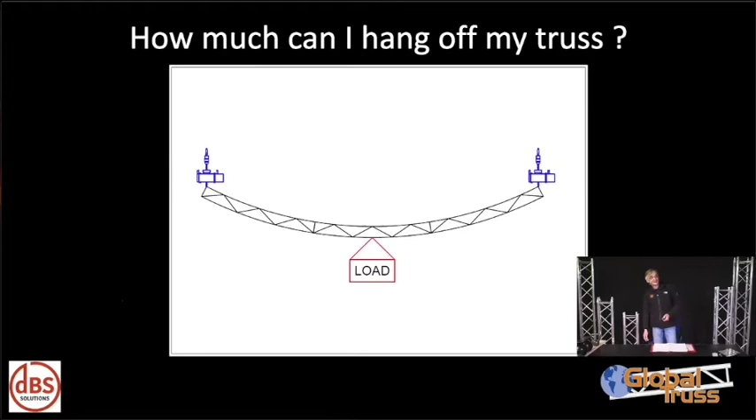Coming to our first bit, how much can you hang off your truss? If you did do part one, you might remember a certain answer crops up rather a lot in my talks. And yet again, the answer is refer to manufacturer's instructions.

If you do so, somewhere in there will be something that looks like this. There'll be a lot of other stuff too, hopefully, but there will be what's known as a load table. This is the load table for Global Truss's F34. Nice shiny truss, you've even cleaned it, I'm quite impressed. If you look at that big load table, down the left-hand side it says span.

If I could come to the iPad, please. We're not talking about the overall length of the truss. I need to pick that.

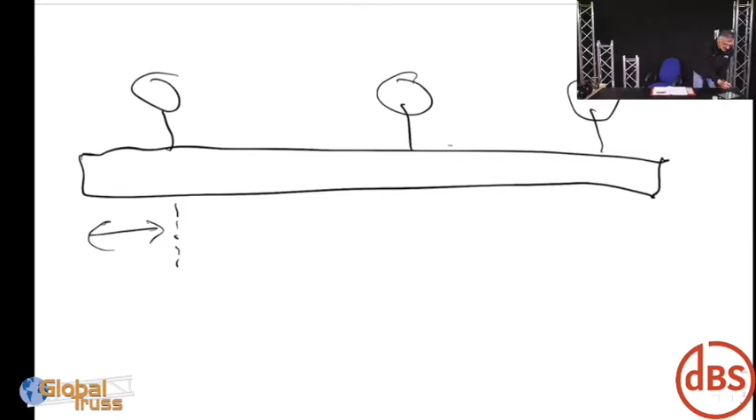So here's our little scenario, if you like. I've got a bit of truss on 3 hoists. You need to break it up into the lengths between supports, which is probably the best way of describing it. So at the end here, we've got a sticky out bit - we'll come back to that in a minute. But we're going to need to look at each span individually. So here's a span.

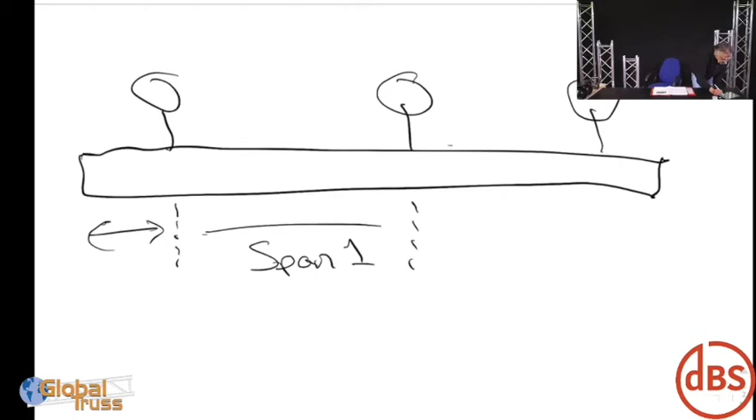We would look at that one for how much we could hang on that. Then we would look at this span. And then finally, there's another strange sticky out bit off the end. So when it's talking about spans, it's talking about the bit of truss between the supports, if you like.

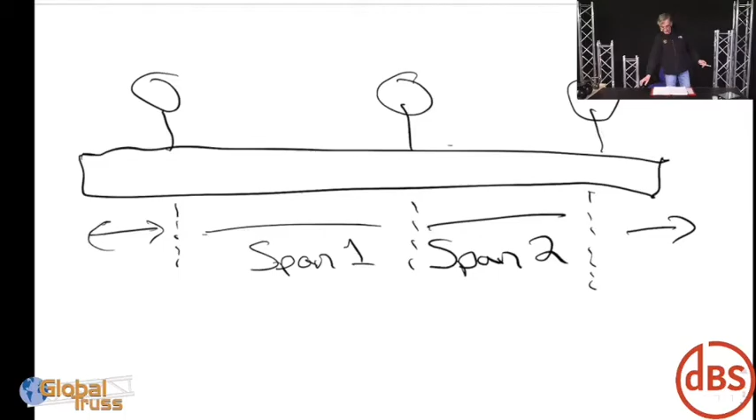Okay, if we come back to the PowerPoint, please. Thank you. If we look at our load table - have I got focus? There we go.

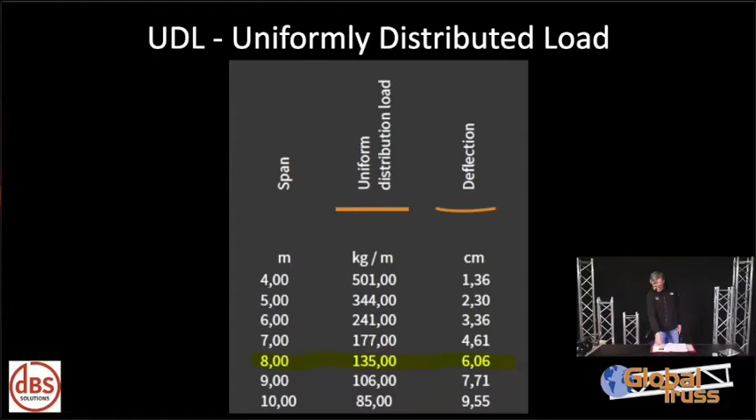A UDL is what the truss likes best. As far as it's concerned, that's the nicest way for it to be loaded. So if we look at an 8 span, it says we can hang 135 kilograms per meter. So yeah, think about kilos you can have as a uniformly distributed load.

If you do that, it tells you the truss will bend or deflect - quite a useful little feature. If you know roughly how much it should bend and it bends something different, you probably want to find out why. If it's bent more than it's supposed to, somebody's added some load you don't know about - the lampies have come along and stuck 6 more moving lights on it. You're potentially overloading it.

If it's less than it's supposed to be, you probably ought to check as well. The lampies might have taken 6 moving lights off - where have they put them? They've probably gone on something else.

You've also got an issue - if things aren't what you expect them to be, you need to tell people. Because if the load on your truss isn't what you said it was going to be, the load on your hoist has changed, and then the loads you're applying to the roof have changed. People need to know about that. So there we go, that's a uniformly distributed load and a little bit about deflection.

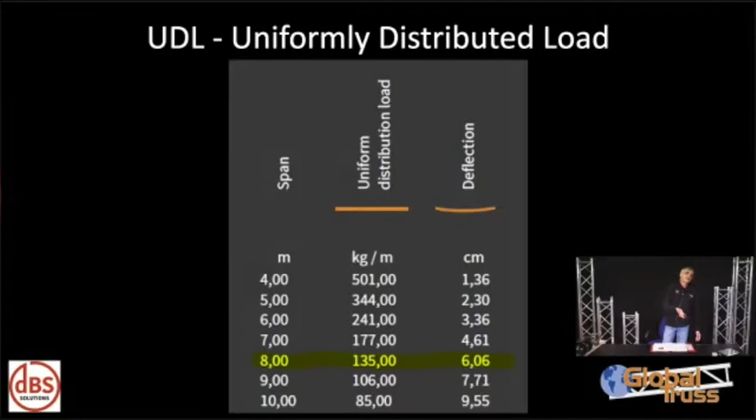If you come across the table - I've lost me again. The next one it gives you is a center point load, and this is really going from one extreme to the other. This is you taking all the load and putting it in the worst possible place, right in the middle of the span.

Center point load numbers can be a useful quick check because it's the worst possible case - there's no way to apply the load to the truss that's worse than this. So for a quick check on site, you can ballpark it: get your calculator out, figure 8 movers at this weight, 8 at that, add a bit for the cable, add it all up. If that number is less than the maximum center point load for the truss, you can stop worrying about it because there's no way they can put it on the truss in a worse configuration. So it's a good ready check on site.

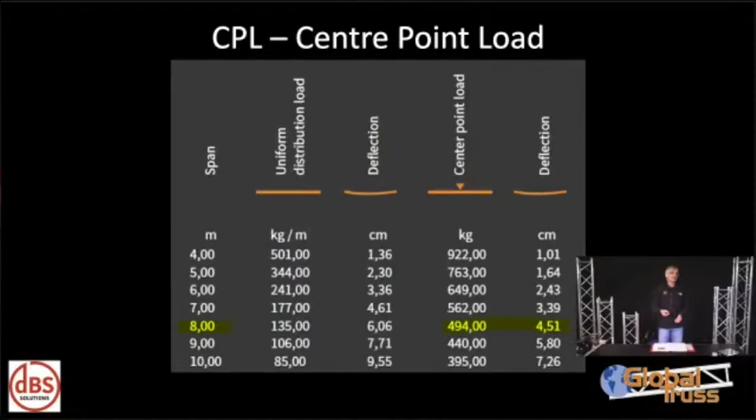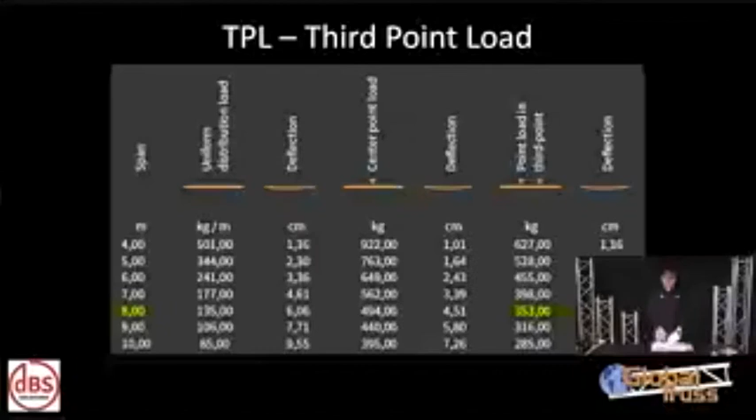If we move across the table to the next bit, it's a third point load - this is 2 things on the truss. Engineers think about it differently: they don't think about how many loads you apply, they think about how many subspans it breaks the span into. So a third point load is 2 things evenly spaced on the span. Same deal, looking at an 8-meter span: you can hang 2 things of 353 kilos each, a total load of roughly 700, and it'll bend just over 5 centimeters.

You could still use that quick check thing, adding it all up to see if it's okay. But now you've got a judgment call to make, because they could, in theory, hang it in a worse way than this. So you have to be satisfied that how the load is being applied to the truss is more distributed than the 2-point third point load scenario.

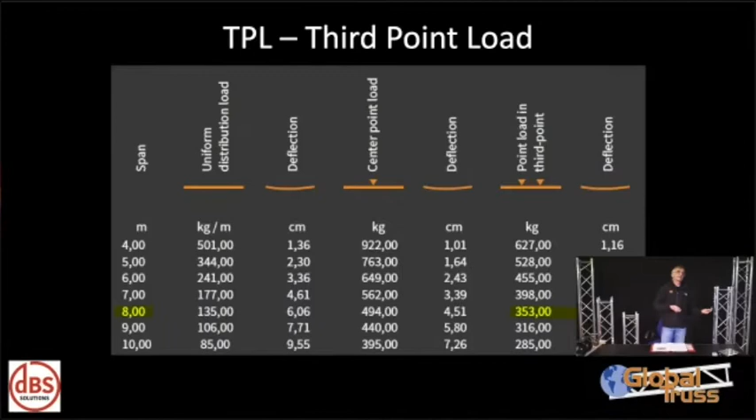If you continue across, it's just more of the same. The next column is a quarter point, which is 3 things, and the last chunk is a fifth point, which is 4 loads. By the time you get much beyond that, you're getting pretty close to a uniformly distributed load. So for each of your spans, you can check the numbers and confirm what you're doing is all right.

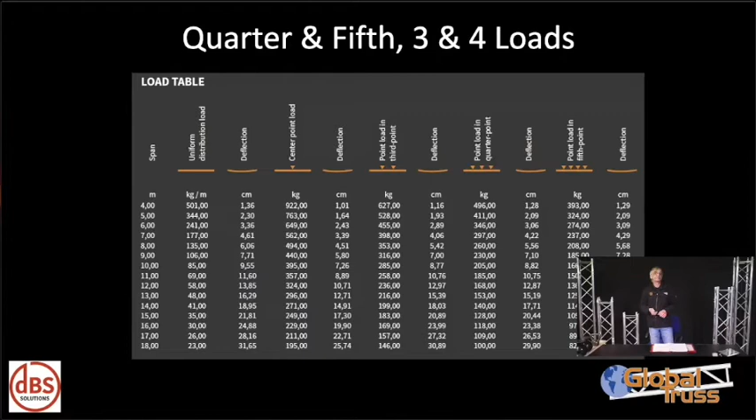However, remember at the start there were the funny sticking-out bits at the end - those are known as a cantilever, where it's only supported at one end. There should be separate data for that. So here we go, same product, cantilever loads: for sticking out 3 meters, 10 feet beyond the last hoist, as a uniformly distributed load, you can hang 179 kilos per meter. Perhaps more relevant, you can hang 317 kilograms at the end of it - that's pretty scary, but the manufacturer says you can. And if you do, it'll bend about 2.3 centimeters.

The manufacturer is saying you can do this - they're not saying it's necessarily a good idea. Let me show you with the iPad: here's my 2 points, here's my bit of truss. The manufacturer says this is how much you can hang off this end, but if you don't put anything on the other end, the whole thing's going to tip over and probably fall out of the sky. So yes, the truss is strong enough, but you have to assess the stability of the whole system to decide if it's actually a good idea.

So that's given you, from the manufacturer's data, the information you need as to how much you can hang on each span and the cantilevers at the end.

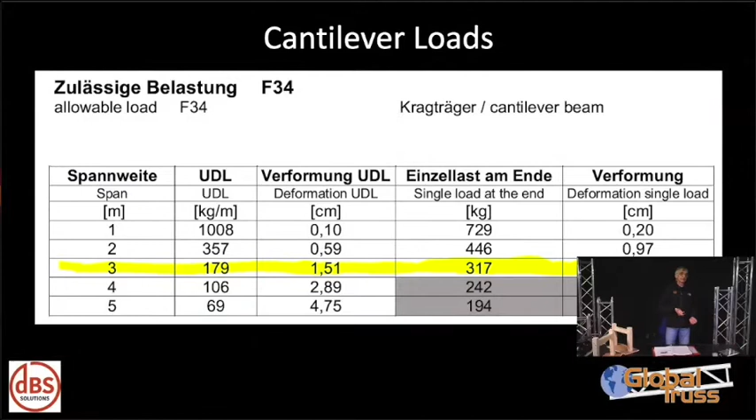Okay, let's come back to PowerPoint again please. Let's talk a little bit more - I haven't got focus. Too much technology. No, we've done that.

Let's talk a little bit more about truss cantilevers, because there are some issues with these. This is Liverpool Philharmonic, probably my favorite gig - it's great to work because that roof you can see is a false ceiling, and the actual beams you rig off are above it. That false ceiling is a foot thick of concrete - you're not going to be making any new holes in it. The points are where the points are, and the vast majority of those points have a hoist up on the roof above them, so most of the time all I have to do is press buttons, which is fabulous - we like that a lot. However, the points being where the points are can cause you some problems.

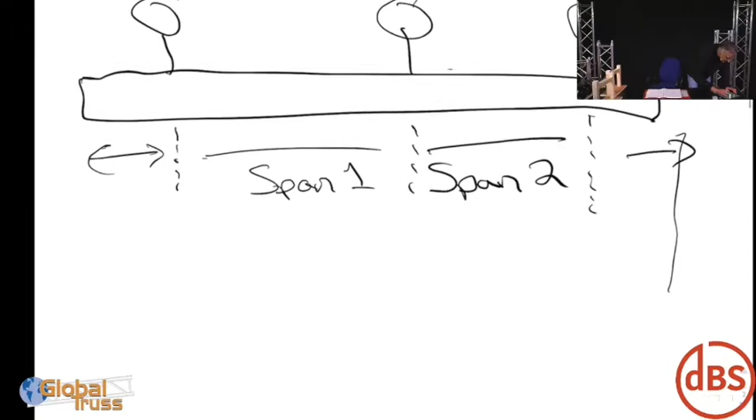Could I come to the iPad please? So, how do I do this... okay, I'm not very good at drawing this, but we'll have a go. Here is Liverpool Philharmonic. The points are where the points are - end of story.

Now, it's a fantastic, amazing grade-something listed building. But usually every November they want to do a panto - obviously not last November, but prior to that they used to do a panto. And they want it to look like a theatre, what they call that proscenium arch black box.

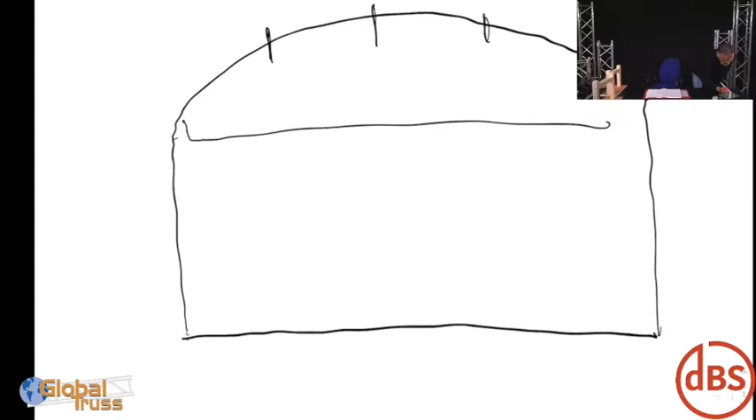So they want to put a truss in here, they're going to put some legs on it like that, and there'll be a border across the top. So they're trying to make that black box so it looks like a theatre.

Points are where the points are - that one's kind of in the wrong place, but there's nothing I can do about that. So the only place we could pick this very wide truss up would be there. If you look at this bit, that's a huge cantilever.

You might have the information for the truss and you might decide it's all right. To be honest, if it was just like drape, black wool serge, the truss is incredibly strong, you probably would be okay. But if they wanted to hang flats or something heavier off it, you've got a bit of an issue here, because that's about 5 meters, which is a very big cantilever.

There are some options. On this end point, instead of going straight to the truss, I could do what's known as a truss bridle. So I could pick the truss up like that.

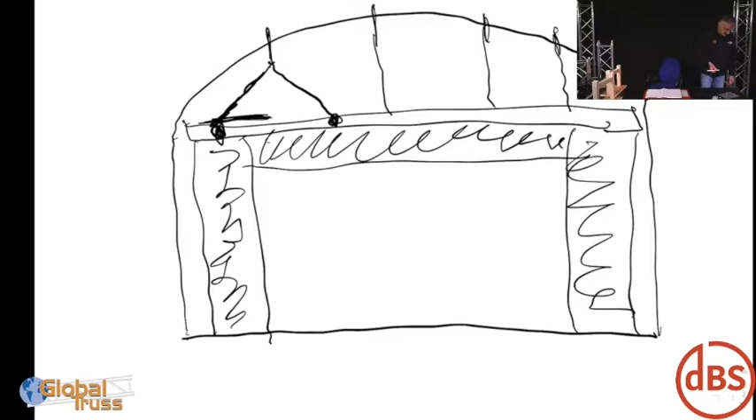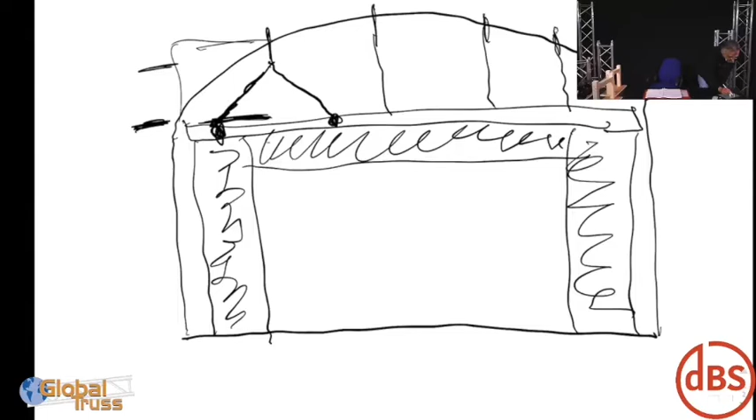There's a couple of issues if you do this. First of all, you need to look at your particular scenario, but you're potentially losing a lot of trim height. In Liverpool Philharmonic it doesn't make any difference because I've hit the roof, but if it was a flat roof where it could go higher, I can't, because that truss bridle will stop me going as high.

You're also into all those angular forces we talked about when we had a look at truss pickups. And if we did a weights demonstration with some scales, we saw the forces in an angular pickup like that can get really, really big. So you're going to need to be careful there.

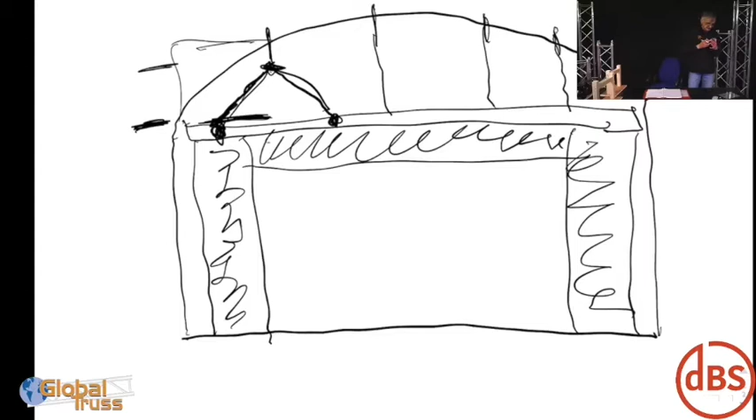There's a couple of other things you're going to need to be careful about.

If you remember from part 1, when we looked at structural trusses, this is a structural truss, so it's strong in those directions. It's strong, designed to be picked up vertically and loaded vertically.

If you look at what the pickup's going to be like at the two ends of that truss bridle, instead of loading it vertically how it's designed to be loaded, I'm now pulling that way - I'm not loading it in the same direction.

You're also starting to do really nasty things in terms of bending the truss. You're loading it how it's not designed to be loaded. You've got another issue as well, and it's particularly with this sort of truss.

If that's going that way, I'm pulling on the cross braces, so you're potentially bending things. It's even harder with this sort of truss, because it's not symmetrical. If I pick a node on my side, so it holds the round sling, even though that's not good because it's bending the cross brace, on the other side it's even worse because there isn't one to hold it. It's going to do all sorts of weird, strange things.

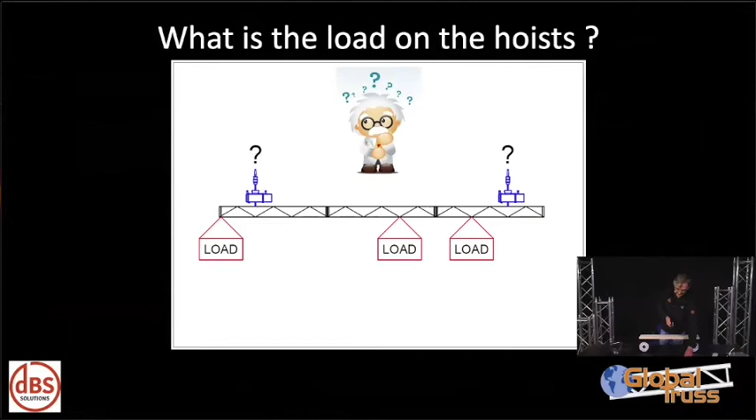If I could go back to PowerPoint, please. See if it, yay. Actually, I've got ahead of myself. I'm not supposed to be on PowerPoint.

We'll leave it. I'm a guardian to an 8-year-old, Aria, and one of her favorite things is to go to the playground in the park. She loves the seesaw, the plank you sit on at each end and bounce up and down. However, I'm a little bit bigger than Aria, and it doesn't work very well because I go down and she disappears off into space.

If you're into engineering, if you haven't been to a kid's playground recently, I'd recommend it — they've got some really neat, clever stuff. What they've done to the seesaw so you don't have this problem is, at the pivot point, there's a wheel, and when you turn the wheel, it moves the plank to one side or the other. So you can adjust the plank to work for two people of different weights, so we're balanced effectively. It solves the problem — me and Aria can bounce up and down and have a great time.

Well, we did till Aria discovered that when her end was right down at the ground, she could dive off sideways, and then I would come down like a rocket and hit the ground with quite a bang, which she thought was really funny, and I thought I'd nearly broken my coccyx. But that's drifting off on a tangent again.

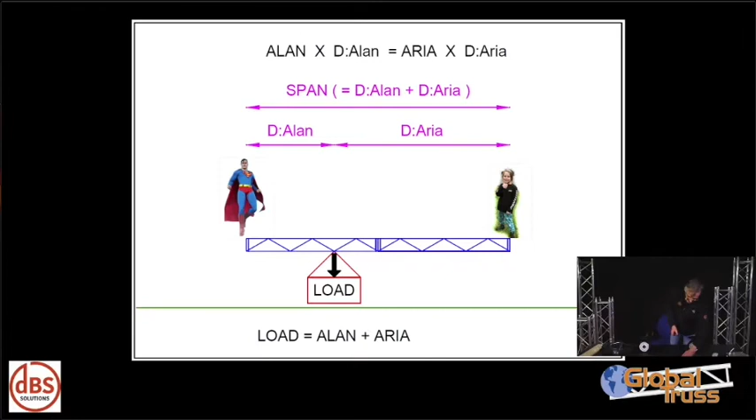At this point, you might be thinking he's been smoking wacky backy in that tea break we didn't even get — but there is a relevance to this. How the load moves through the truss from where the load is to the chain hoists is the same. If I magically change that plank into a bit of truss, and I magically change me into a chain hoist, nothing's changed with the equations — I've just changed the words.

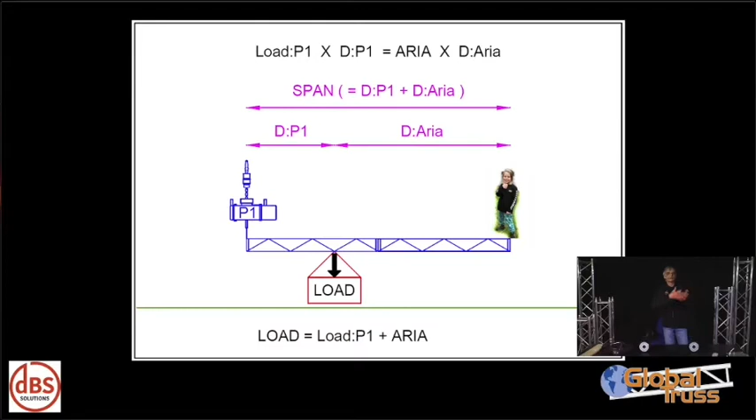Instead of it being the weight of Alan, it's how much of the load moves to point one. And instead of it being how far the load is from Alan, or how far Alan is from the pivot, it's now the distance from the point to the load. So nothing's actually changed. We can do the same thing with Aria — magically turn her into a chain hoist as well, swap the things around in the equations, and it's the same.

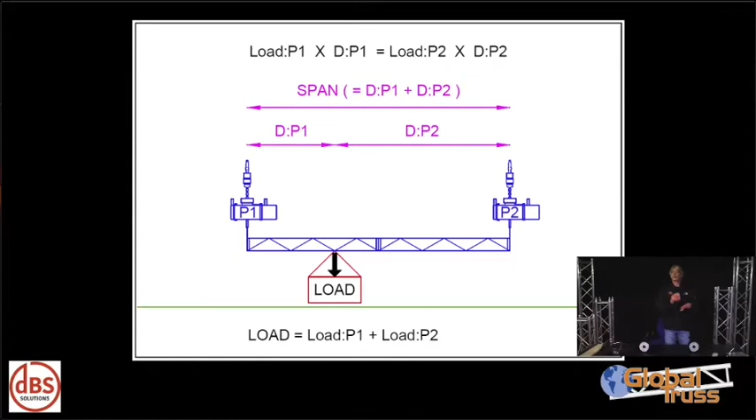So we've got our two equations here. You can go off and do a bit of algebra with them and play around with them. I'm not going to - you'd be even more asleep than you already are, but it's not actually that difficult. You take the two equations, you jiggle them around a bit, and what you end up with is this.

So what it's saying is the amount of the load that is applied to point one is the length of the span minus the distance of the load from the point, all divided by the length of the span, times the load. So it's a fraction or a ratio, if you like, of the load. And the other one's the same: the amount of the load that goes to point two is the span minus the distance to point two, all divided by the span, times the load.

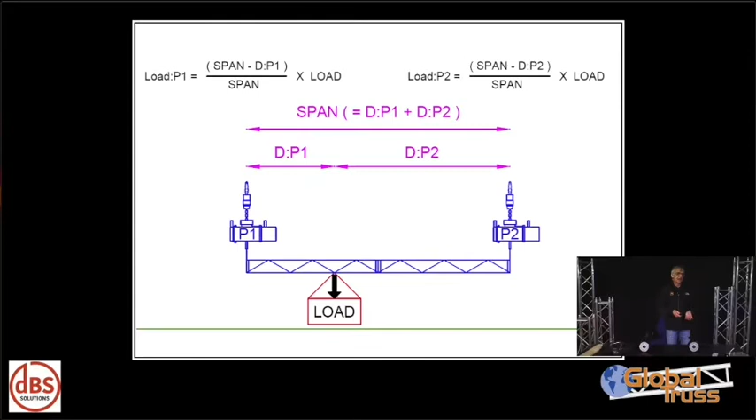Now that's a bit mathsy, and some people think mathsy, some people don't. So let's just put some numbers in it, and maybe that'll make it a little bit clearer. Let's say my load's 100 kilos. It's 2 meters from one point, 4 meters from the other point, so hence my span must be 6 meters.

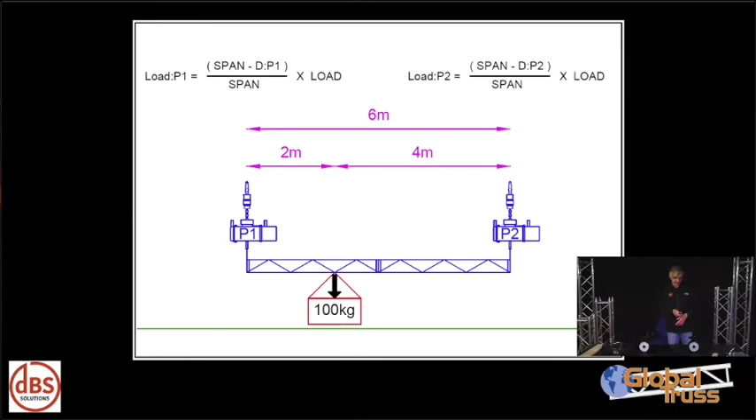If you plug the numbers into the equations, if we look at how much of that load goes to point one, it's the span 6 minus the distance 2, which is 4, all divided by the span 6 - 4/6, which is 2/3. 2/3 of 100 is round about 67 kilos. If you go and do it at the other end, same deal: span of 6 minus a distance of 4 is 2, all divided by the span again, 6 - 2/6, so a third of 100 is about 33 kilos.

I like it when you go through this process and the answers that come out are kind of intuitively correct. It kind of makes me a bit more comfortable. The load is closer to point one than point two, so you would expect more of it intuitively to go to point one than to point two. And that's what's happening - there's 67 on one and 33 on the other. We're also not creating anything out of thin air: 67 plus 33 is 100. So they're kind of intuitively correct, really, which is good.

Okay, let's come back to camera briefly, please.

So what we're saying is, if I apply all of the load at the point, as you'd kind of expect, all 4 kilograms is on this one. If I then move my load a quarter of the way along the truss - these scales aren't that accurate, so don't expect it to be totally precise - a quarter of this load is now going to that one, and there's only 3/4 left on this one. So I've got round about 3 kilos and round about 1 kilo.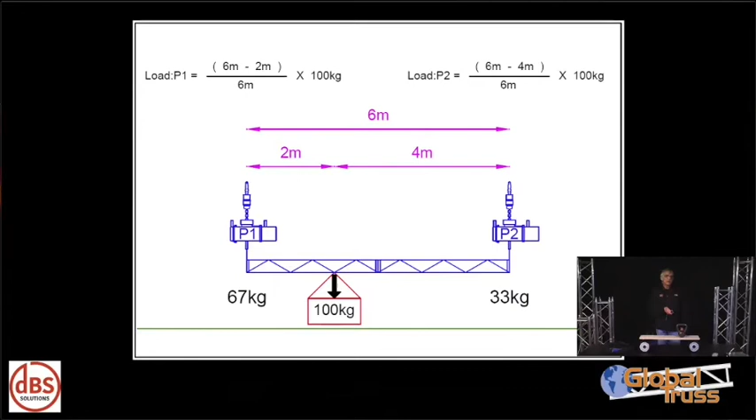So that's on a span, but we've got them jaunty cantilevers at the end to deal with as well. You can do the same thing again - all that leverage and area and the seesaw and all the rest of it - and you end up with 2 equations.

The load that's applied to the nearest point, or the one at the end, if you like, is the span plus the length of the cantilever, divided by the span. And the amount that's on the other one is minus the distance, the length of the cantilever, divided by the span. They are actually the same equations, but you just need to be careful with signs, and some of the numbers become negative. If you just put normal numbers into that, it kind of works.

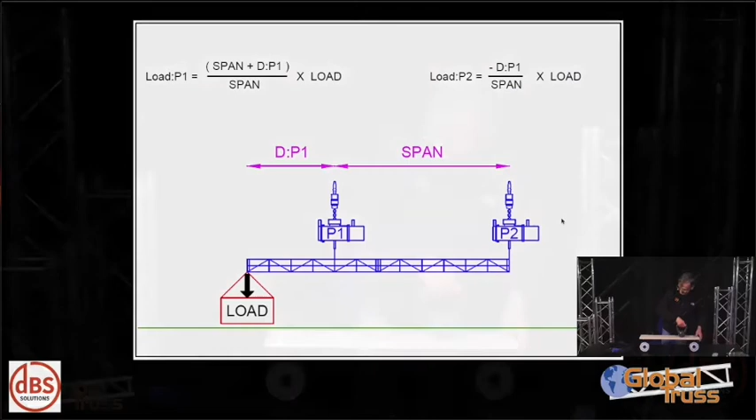What's kind of interesting with that, if we come back to camera - I'm thinking about that negative one as well. I can't completely show this because it'll fall over, but if I do something a bit like that, I'm going to have to put my hand on this. See if it'll work. Oh, yeah.

So if I've got a load on the end of a cantilever, it's effectively acting as a lever round the point, so this one actually wants to go up. It's getting very precarious - there you go. It's pushing up quite strongly on my hand. So the load on that one's negative.

That stability thing we were talking about, unless you put some more loads on it, it's going to tip over. It's all got to balance out. So you've got a negative one here, and you've got this. The load on the point nearest the cantilever is more than the weight of that, because it's the weight of this and the load over here.

You need to watch it because my scales don't actually go high enough. It's gone all the way around and it's starting again. So we're at like 6 kilos or something because of that leverage effect.

So you do need to be careful with cantilevers and the loads you're applying to the point nearest the cantilever, and also what you're doing in terms of negative loads on the other ones.

Okay, can't done that. All my papers sticking together. We've done that, done that. Okay, let's come back to PowerPoint, please.

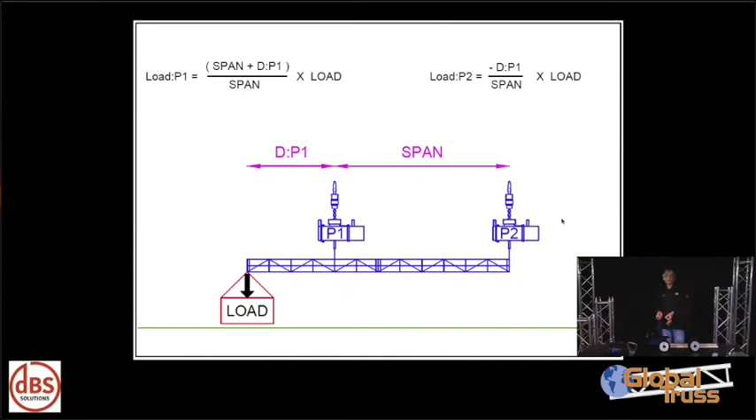So you're going to need to do that, the maths in your equations, for every load that is applied to the truss and to every span and every cantilever. The reality is you're probably going to put it into a spreadsheet. Otherwise, it's just going to take you forever.

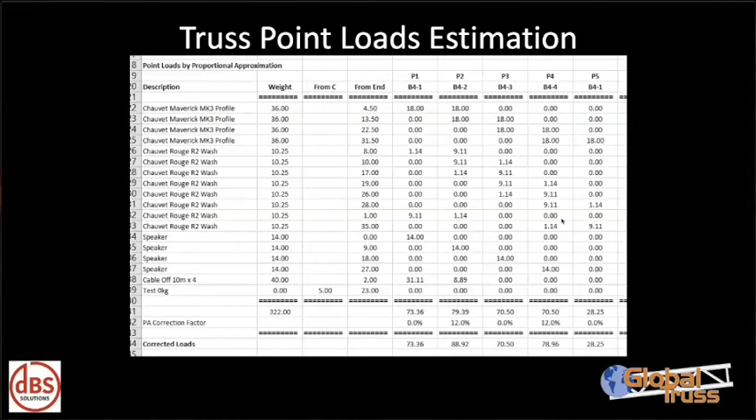Down the side of this, I've got all the things that are on the truss. I've got how much they weigh, where they are, either measured from the center of the truss or from the end of the truss. And then it works out for me how much of the load goes to point 1, point 2, point 3, point 4, and point 5. This is obviously a 5-point truss. And then it adds it all up down the bottom.

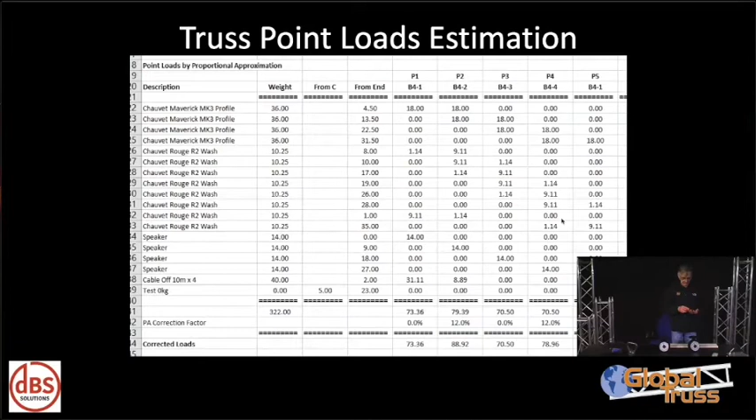I would add a bit of a caveat or warning to this, really. You have a statutory obligation under LOLER for lifting operations to be planned by a competent person. You need to know what you're doing if you're starting to do that kind of stuff and plugging it into spreadsheets and all the rest of it. But that is what you would do, and that would be the maths that you would use.

Okay, let's just come back to camera, please.

I did say right at the start of all this that it's just an approximation. It's called a proportional distribution approximation, because we are assuming, like the plank on the seesaw, that our truss is completely rigid and doesn't bend. But we already know that's not the case. Our truss bends. So it's not 100% accurate, if you like. Where are my other bits?

So how might we get the real answer? We can approximate it, but it would really be quite nice to know what the real answer was, wouldn't it?

You could just weigh it. You can get a thing called a load cell, which is basically a digital version of a scale. They're usually built into the body of a shackle. So you would put them in your pickup or even at the point in the roof. They've got a display on them, but they all talk back to a computer. You can get it to do fancy things like give you overload or underload warnings and all the rest of it. If you're super duper posh, you can actually get battery powered wireless ones, so you don't even have to run all the cables. So you could weigh it.

They're a thing we ought to use a lot more than we do. Where we do see it is in touring world. We'll get a drawing through with the estimated weights on it. Version 1, fantastic. They'll then go into production rehearsals for 1, 2, 3, 4 weeks to get the show all sorted out before they actually head out. And they will hire the load cells for the production rehearsals, and they'll actually weigh it. And we'll get a version 2 plot through a little bit later on going, we've weighed this now, here are the real weights. So the only thing you perhaps need to consider is you need to estimate it first, so you're actually sure everything's strong enough and you're not going to do something silly, but you can get the real weights later on with a set of load cells.

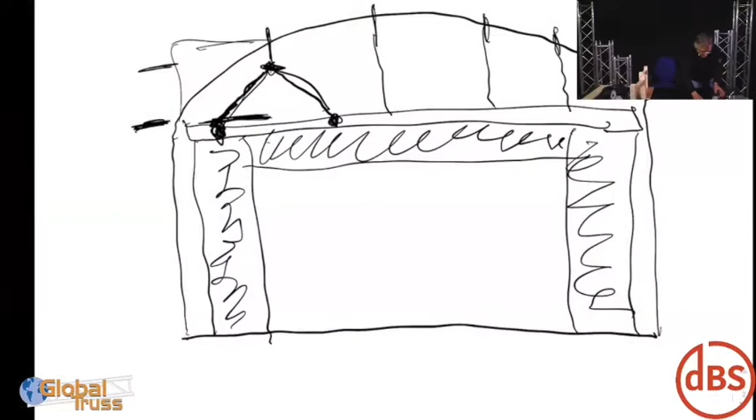Okay, let's do a real world one. Don't panic, we're going to deliberately pick a really simple one that we hardly need to use the formulas at all. If I could come back to the iPad please, let's get that one out the way.

Okay, let's make it really easy for ourselves. Here is our scenario: we have a bit of truss with an LED video wall on it. The truss and the video wall weigh a ton, and we're going to pick it up on 2 hoists, right at the end, so there's nothing complicated going on.

What do you think the load's going to be to each hoist? It's not a trick question, it really is that simple. 500 each.

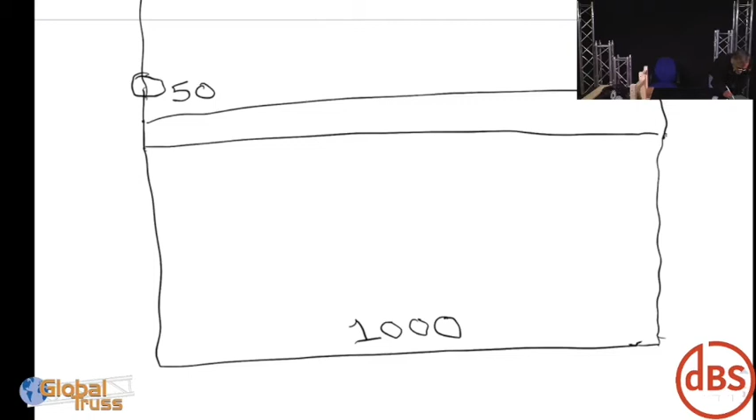Brilliant. However, let's say in our little scenario, our venue has plenty of points we can attach to in the roof, but they're only rated to 0.5 ton, 500 kilos. We probably go, ooh, that's just a bit tight really. So let's stick another hoist in.

What's the load on the hoist now? You might go, well, it's all completely even, completely symmetrical, it must be evenly between the hoists. So it must be.

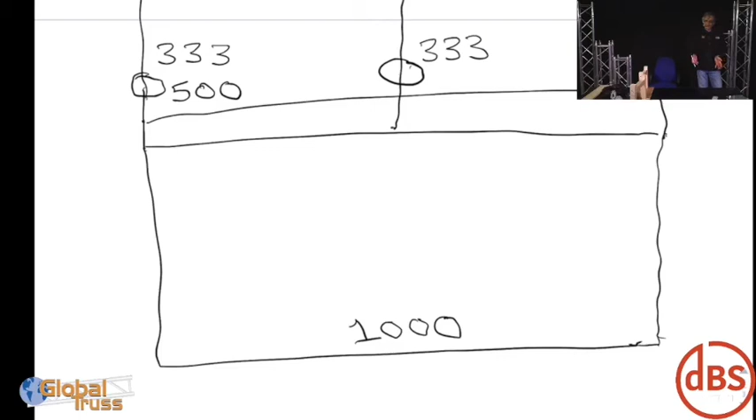Okay, reasonable answer, but let's do our process with the equations of looking at each span and do this properly. So we're going to look at this span first. It's symmetrical, it's half the screen, it's 500 kilos for that bit, it's uniformly distributed, the points are right at the end, nothing complicated, exactly what you'd expect. You're going to have 250 going to that one and 250 going to that one.

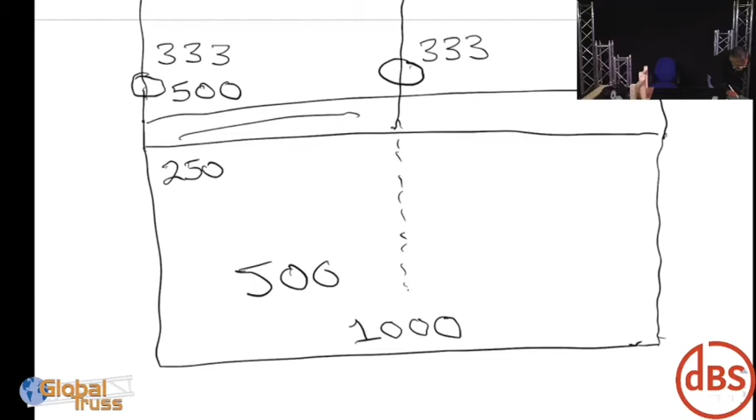Fantastic, job done. Move on to your next span, which is this one. Same deal, again it weighs 500, nothing complicated, moves the hoist in the same way. Now I have to do the adding up bit.

So what you actually get using our proportional approximation thingy is 250, 500, 250. In terms of our little scenario of the 0.5 ton points in the roof, we've not actually made it any better, have we? We're still in kind of the same place.

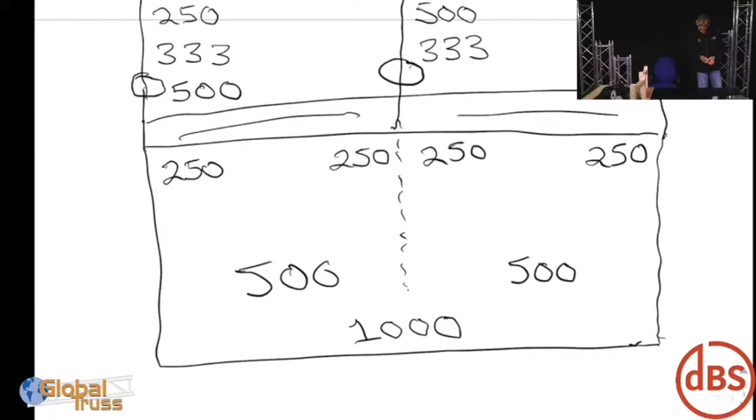However, yeah, I have got room up there. We said this was just an approximation, it doesn't take into account the truss bending. It will depend on the truss, but the real numbers could well be something like... that's a 6. So not only have you not solved the problem, you've actually made it a lot worse.

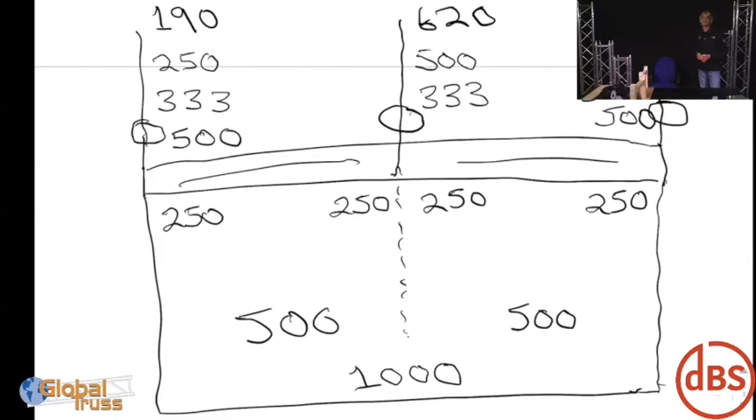The numbers that are quoted are 19, 62, 19 in terms of percentages. So I've got potentially 620 kilos on that center point. So your answer actually would be you'd have to go to 4. If I can just come back to PowerPoint please.

It will depend on the truss and it will depend on the spans, but here are the real numbers having done the maths for uniformly distributed loads. So that 3-point truss were 19, 62, 19. As you get more and more hoists, it gets closer and closer to that approximation. So the 4-point one's not quite so far out and the 5-point one's even less out. But the 3-point one is potentially a long way out.

I'm not saying don't do 3-point trusses, I'm just saying be aware of the issues. Your numbers could be misleading.

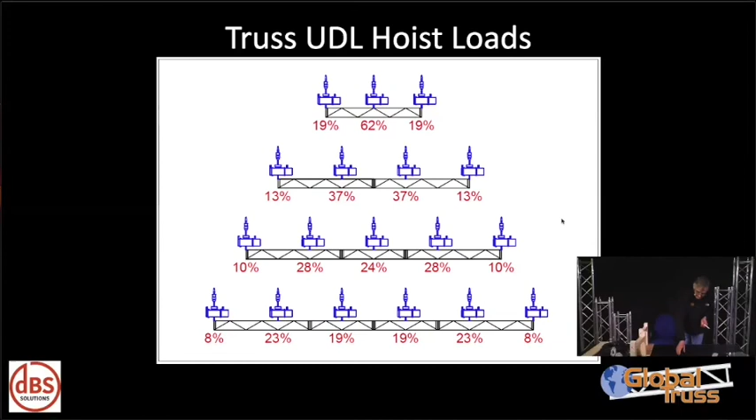I went into a theatre that had just had a squillion pound refit, a little bit like Liverpool out front. It was a false ceiling. They had permanently installed hoists in the roof for a front truss, 3 of them. The 2 outside points were 1 ton, the middle one was 2 ton. So they'd obviously thought about it a bit. So really, yeah, just be careful with 3-point trusses.